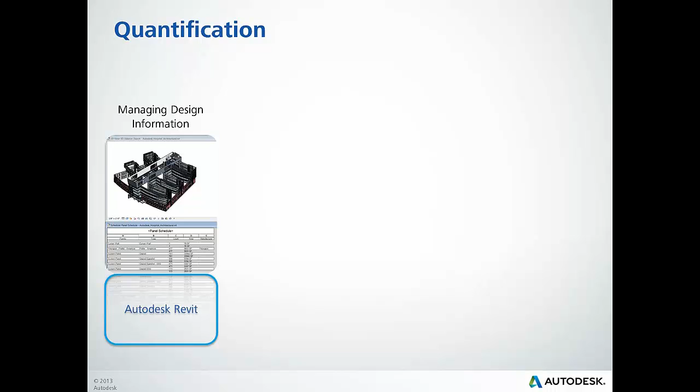Next, we'll work with an item and resource catalog information in order to classify the model elements further than the model authoring tools can. With the catalogs available, we quantify the model using intuitive and easy-to-use tools in Navisworks, which uses a quantification workbook that is our central location to create and manage the quantities within our model. The workbook also leverages the item breakdown structures and resource breakdown structures in the catalogs, in that we can see a roll-up of the total quantities for an item collection with its resources as well as the individual elements' detailed data.

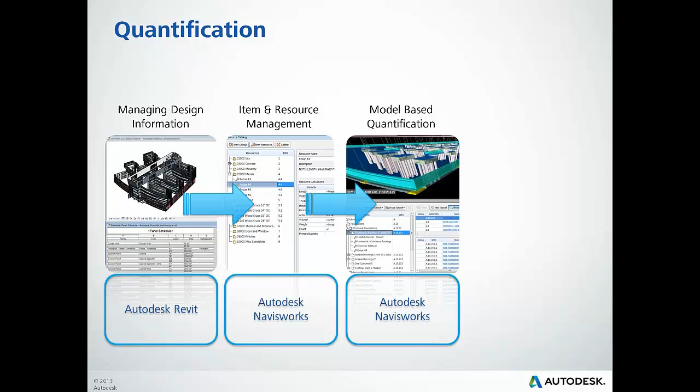With traditional paper-based quantification methods, dealing with changing or updated project information can be frustrating and extremely time-consuming, as manual counting methods are repeated when a change is made and communicated. With a model-based approach, the use of Autodesk Construction Solution, the management of changes is easy and effective using an analysis engine that compares a previous version of the takeoff with a new model. The reporting of the quantities is also made easy with the ability to export the entire workbook or any subset of it to Microsoft Excel for use in downstream estimating applications. And again, it's very important to know that the Autodesk Construction Solution ties directly into our data management and collaboration solutions.

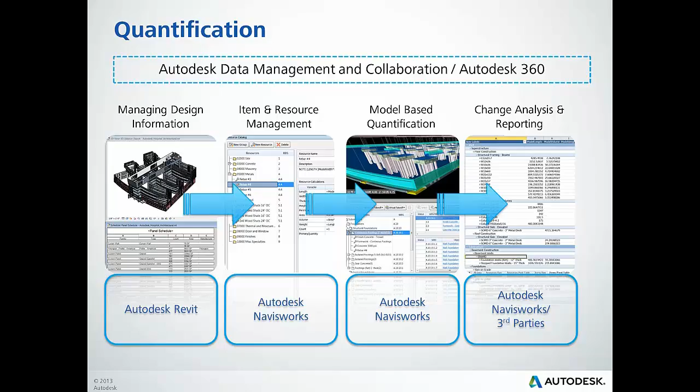Today's estimating processes rely heavily on 2D documentation and manual counting of project elements and components, which can be error-prone and very time-consuming. Leveraging a model-based workflow for quantification can reduce the time it takes to generate project quantities and enables workflows for adding valuable construction information to project elements during the process.

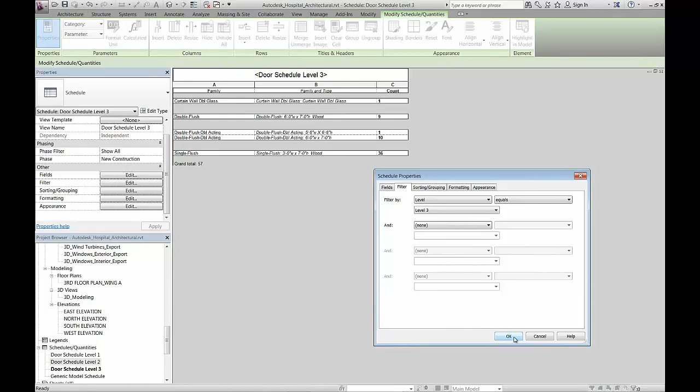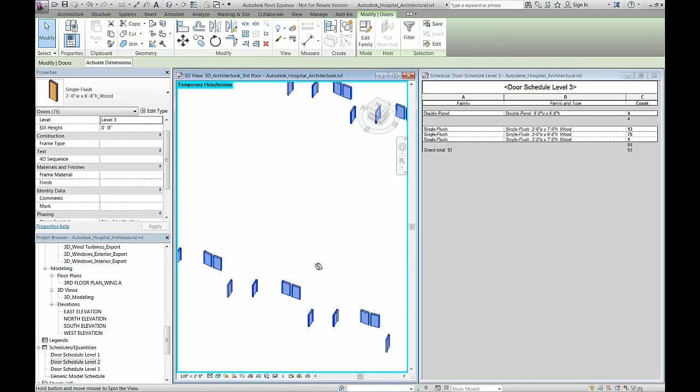Here we see how the Autodesk Construction Solutions offer several ways to gain access to quantity information early in the planning process. By leveraging tools directly from the modeling applications, we can quickly get a high-level understanding of the project quantities. Schedules or tables of data built from the model, created by the designer, can be used by adding counts and totals, or a custom table can be generated on the fly to give you the feedback and quantities from the model information immediately. Here, we are working with item and resource catalog information in order to classify the model elements further than the model authoring tools can.

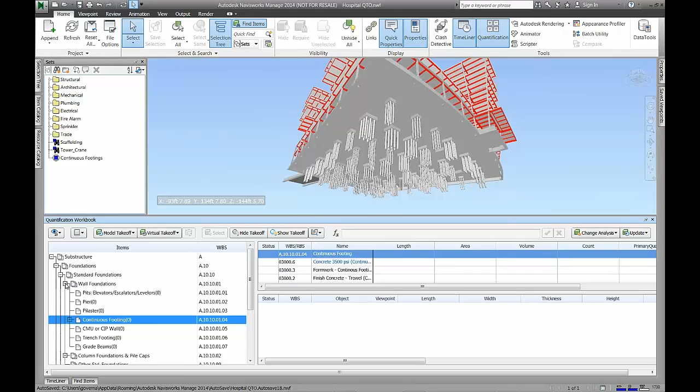With the catalogs available, we quantify the model using intuitive and easy-to-use tools in Navisworks. The quantification workbook is our central location to create and manage the quantities within our model. We simply select an appropriate item within the catalog for quantification and can either drag and drop elements from the model to the appropriate items, right-click on any model element and select the catalog item to use, or use a toolbar to quantify the elements on the fly.

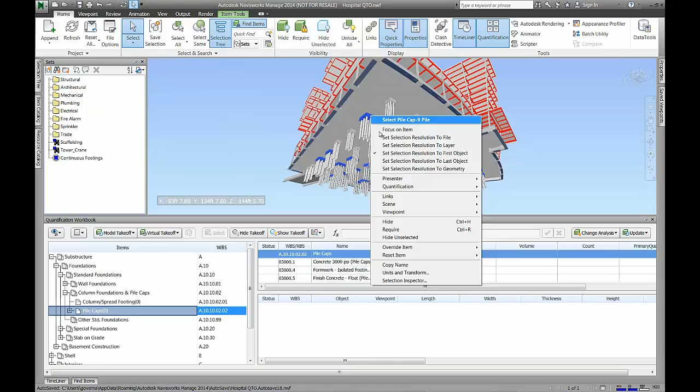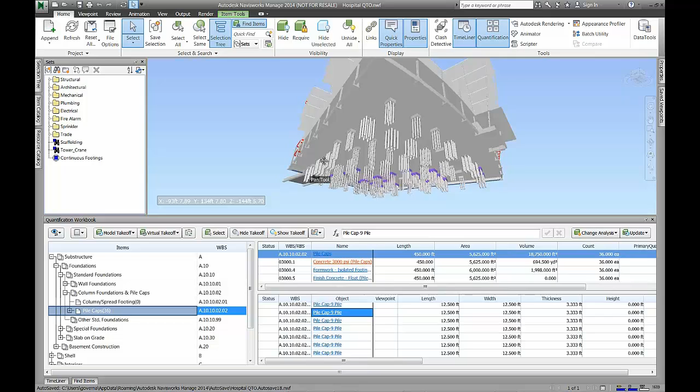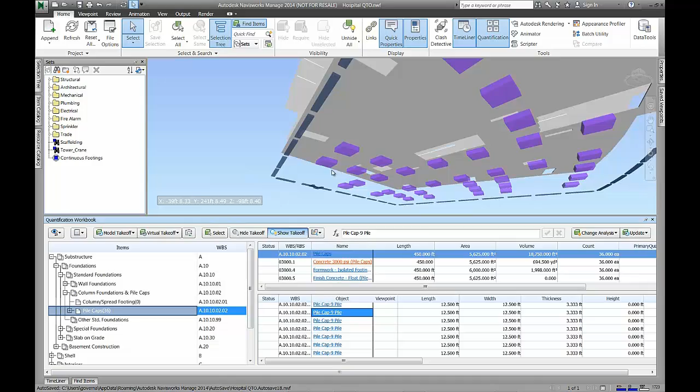As we see here, once elements from the model are quantified, their display in the model is updated with the color and transparency settings from the catalog. This ensures that we see exactly what has been quantified and can quickly toggle between showing the model elements that are done versus the elements that haven't. The workbook also leverages the item breakdown structure and the resource breakdown structures in that we can see a roll-up of the total quantities for an item collection with its resources, as well as the individual elements' detailed data. To complete the quantification of the model, we simply continue to walk through the workbook and pull model quantities into the system.

Another challenge the design phase quantification of building projects face on a regular basis is the fact that project information inevitably changes. With a model-based approach and the use of the Autodesk Construction Solution, the management of changes is easy and effective. Because we are working with a model, the changes can be incorporated and tracked using Navisworks very easily. We see that the model within Navisworks has been refreshed and run an analysis for the quantities to see what has changed. An intuitive set of icons is showing us the changes and how they affect the quantification, along with tooltips that display the details of the changes. We can either accept the changes and they are incorporated into the new quantification, or we can remove the existing quantities and perform a fresh takeoff for the new or updated elements.

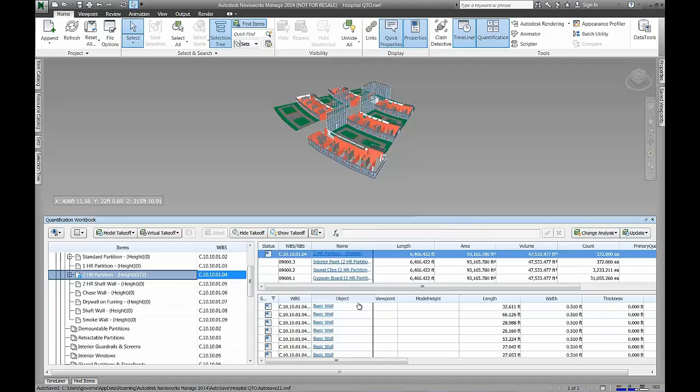Leveraging a model-based workflow for quantification can reduce the time it takes to generate project quantities and enables workflows for adding valuable construction information to project elements during the process.